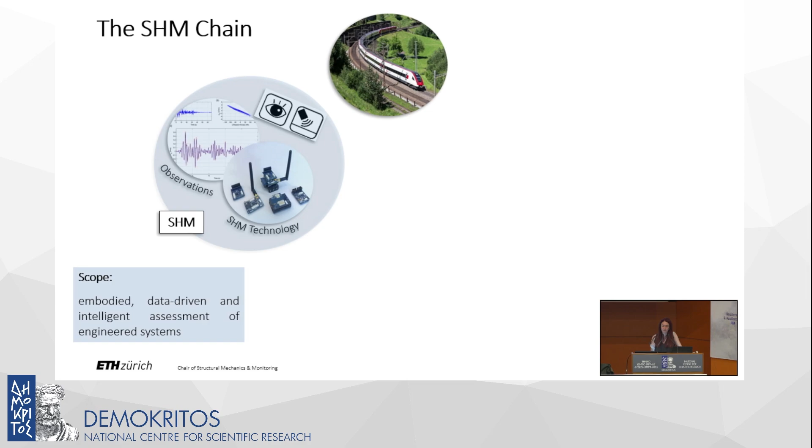So I would like to first introduce the problem of structural health monitoring, which essentially relies on the perspective of viewing physical assets as cyber-physical systems, in the sense that you initiate from a physical asset on which we can extract information by means of sensing, which nowadays we can actually extract through various types of sensors serving different types of properties, and which come at different precisions and costs that are even deployable on large-scale civil engineering structures, which is a lot of the domain of the activities that I will be overviewing,

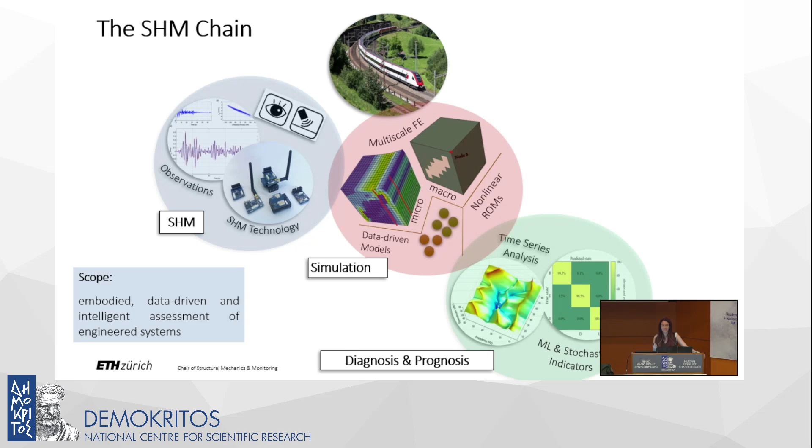and which can be used to understand and produce indicators on the condition of a system as is, meaning as it is currently operating, which is more of the task of diagnosis, as well as predicting the behavior and performance of the system in the future, which is the prognostic task. Now, the key to deriving these indicators in a way that is meaningful, we at least advocate in the group, is to use models that are rooted on principles of engineering, on principles of mechanics and dynamics, or first principles in general for understanding the translation of the raw data into meaningful information about system condition and performance.

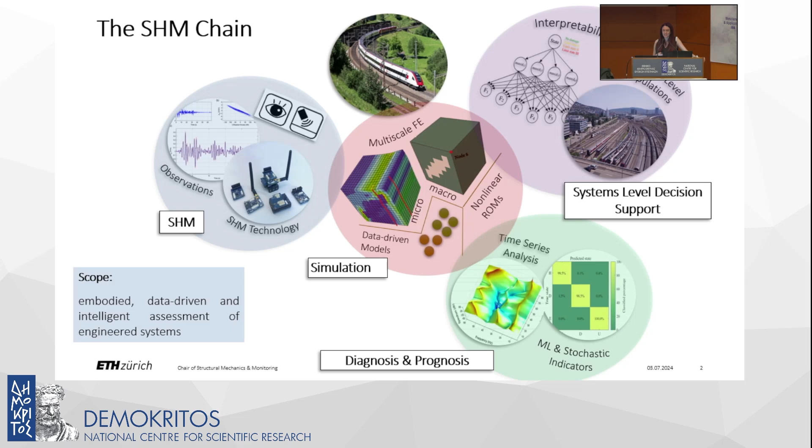And as a last layer of this, let's call it SHM chain, what we would like to do is to extend this kind of performance from the individual system to the level of a fleet or a population of assets. As you can imagine, this could be the roadway network comprising different types of engineered systems, such as tunnels, bridges, or even the road pavements themselves, or a wind farm, which is a population of individual turbines, or even different types of industrial components that are actually comprised of individual elements that are operating and whose performance is critical to assess.

So this talk is going to build on the aspect of modeling, and in order to do this, I would like to actually start from how you can develop models purely on the basis of utilizing data. And again, to place some context in what I will be explaining, I will first overview a few types of data sources that we are dealing with as part of our group at ETH Zurich. So these kinds of data can come from diverse types of systems.

A first option for us is to use what is called the mobile sensing approach, which is the deployment of sensors on vehicles, either train or regular vehicles that are traversing different types of infrastructure, and where you're able to derive information on the condition not only of the vehicle itself, but also of the system that it is actually traversing.

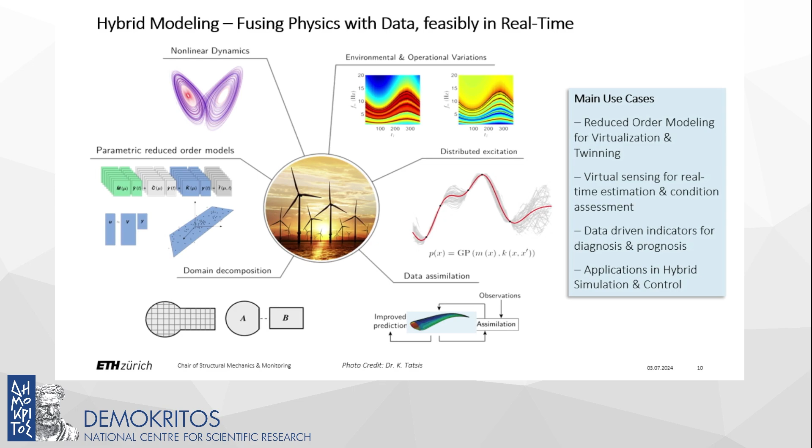So if you would like to describe the task, in a sense, we're trying to achieve everything everywhere all at once. And this is how it would work. If you have a structural system for which you have sensors in some limited positions of the system, and the system operates typically under unknown input loads, we have, as engineers, an a priori model of the system that can give you an idea of how this can behave, but usually, especially for existing structures such as bridges, this kind of model is not well defined, so it has unknown or uncertain parameters.

And what we would like to do is to predict the behavior of the system in its full field, so visibly in every location of this system, even in locations that are not measured, which is why you cannot really escape with black box models, because you need to predict physical quantities that are not actually directly being observed.

So we would like to have a specification of everything in the system, which is also known as the task of virtual sensing. And we would like to achieve this everywhere, so very densely in our system, under the premises of uncertainty, nonlinear or non-stationary behavior for dynamical systems, observations that are limited and are suffering from noise corruption due to the limitations of our sensors, but also large dimensionality of the actual large-scale systems that we're observing, and we would like to possibly do this in real time, so all at once.

And I'm going to show you our approach to achieving something like this. And I would start from where we typically start from as engineers, either civil or mechanical engineers, which is models of computational mechanics. Now, out of curiosity, I know this is a slightly different thing, but I want to check how many of you have studied a course on mechanics. Great, so many of you have, which means that I can at least exploit this as the basis.

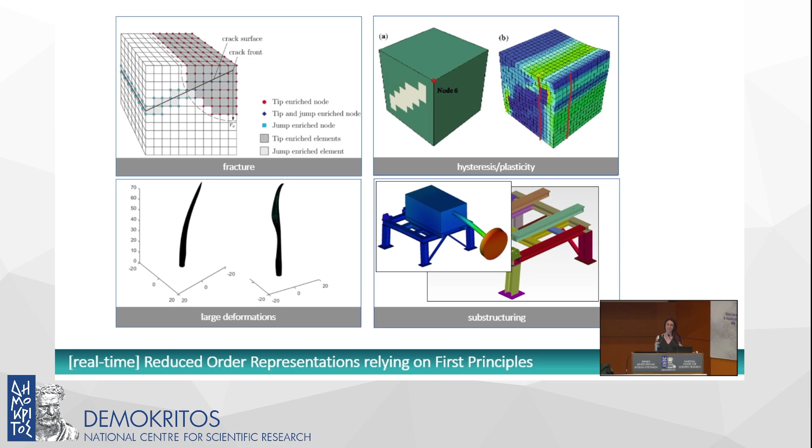So the very first thing we have to do is to actually reduce these types of models to the point where the computation makes sense and even is achieved in fractions of a second, which is really what we would need for our compute. One way to do this is to start by actually using the original, what we would call full-order structural mechanics or mechanics models, and to produce several realizations, computations of these models.

What you can do next is to take the time history data from such models and pass them through a feature extractor, such as an autoencoder, for example, but additionally, an integrator that is able to follow the dynamics, which for us would be a type of recurrent neural network or an LSTM.

The benefit in this being that you can actually solve your dynamics equations in the lower dimensional space, which is the feature space of the autoencoder, but at any point in time, you can actually return back through the decoding step into your original physical system, which is the full-order finite element model in our case, for example, where the physical properties actually lie and where the monitored properties also exist. So quantities such as accelerations or strains will be linked to this full-order space.

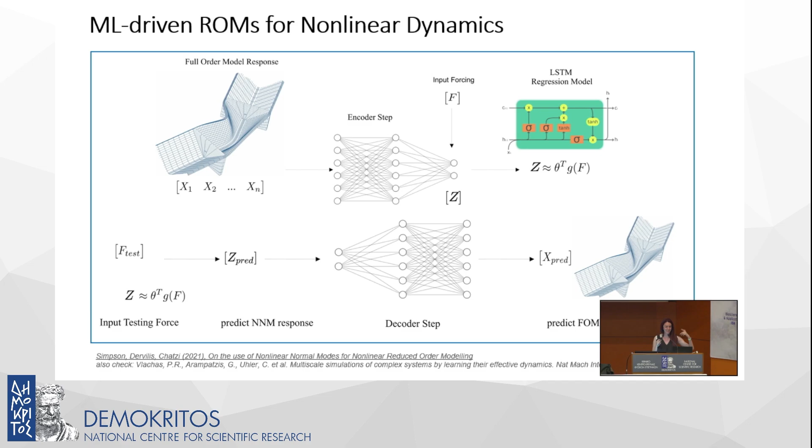Now, in our case, we use this to make the analogy of reduction to what we call the nonlinear normal modes of dynamics in the work of Petros, which is also very closely related for uncovering LED, learning effective dynamics. You can see something similar for more generalized systems.

But just to show you the use case for us, you see that what we tried to do experimentally was to show that indeed we derive these independent representations by using specific versions of the autoencoder. So for example, by using a variational autoencoder, you're encouraging a spherical Gaussian latent space, which means that the components are independent and are easy to separate in the spectral domain, which is of particular interest for us for manufacturing a model that is efficient.

And then we use this kind of logic for an actual problem, which is to approximate the response of wind turbine monopile structures. This was a problem that was given to us by our collaborators in Siemens Gamesa. And the problem here is actually a nonlinear problem, which is induced due to the soil structure interaction. We're trying to capture the nonlinear dynamics that is generated from these actual systems by fitting a model that computes only in fractions of seconds instead of the several hours that this compute would require for the actual engineering task.

Now, in what I described so far, we have a construct that produces a model that can compute fast. You need to devote some time in training, but for us, it's more the actual time during testing that would matter in this kind of application.

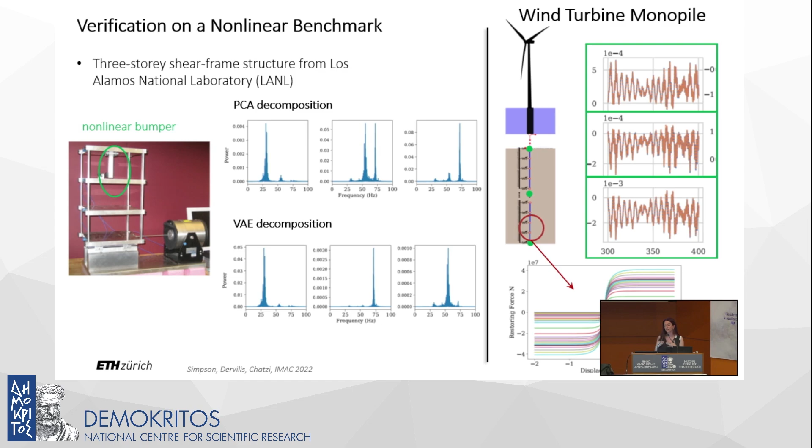The drawback is that I have not yet shown how to condition this kind of model for different parameters so that it is really a generalizable kind of approach.

So next, I would like to show you an approach that we typically adopt for producing reduced order models of dynamical systems that are fast to compute but also conditioned on different types of parameters that are underlying our problem. And to do this, we have constructed, again, more from a structural engineering perspective, a benchmark structure of several degrees of freedom. It's a dynamical system that exhibits nonlinear hysteretic response.

It is described by a set of multiple parameters, including the configuration of this structural system itself, which are basically the stiffness properties of this shear frame, but also the properties of the input to the frame, the loading of the frame, which for us is an earthquake type of load that is characterized by its spectral and temporal properties over time. So we can even break down an earthquake into a set of parameters, and we would like to be able to feed these parameters into our configuration, and we would like our reduced order model to spit out very fast the entire time history simulation of this nonlinear system for different types of these parameters.

So to do this, we're capitalizing on the physics of the problem, and for us, in these kinds of problems, the physics is usually a differential equation of second order, which is nonlinear, and which is conditioned on the parameters that I explained before are governing the problem. And what we can do is to initiate from this original simulator, which usually could be a finite element model of a large number of degrees of freedom.

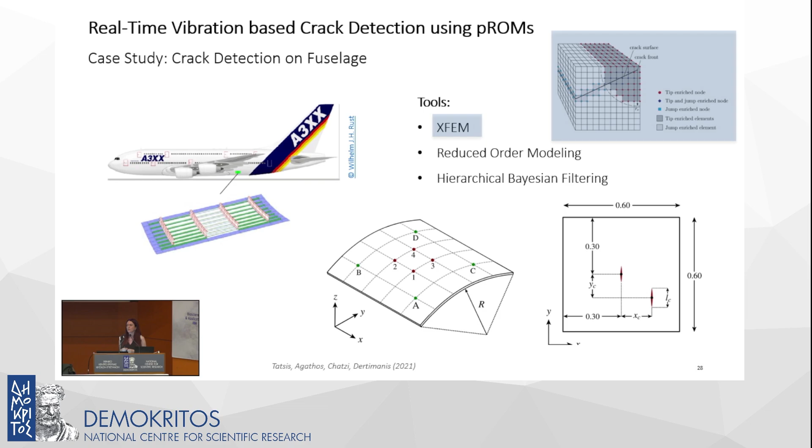Now, the reduction method is similar to what I explained before. There are a few intricacies that I think are beyond the scope of this talk, so I will not very deeply explain. But the fact that here the parameters, which are basically the position and orientation of the crack, induce a non-smooth problem, makes the solution of the problem also non-trivial. It means that we have to figure out a way to extract these bases in a way that is efficient.

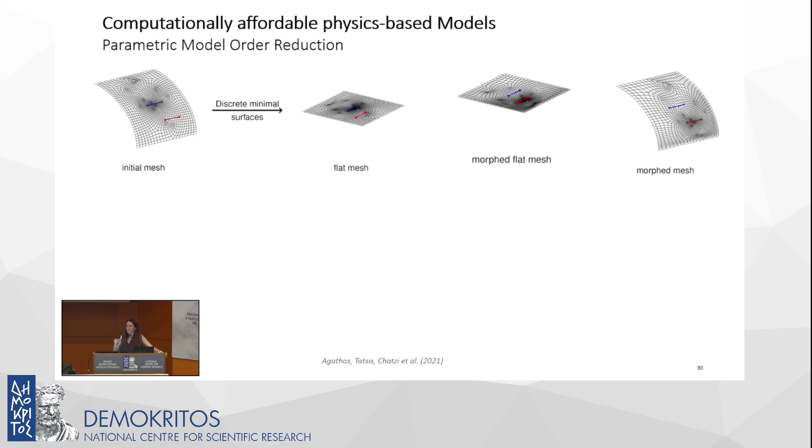Typically, if you have ever solved a fracture mechanics problem, you would know that the tendency is to remesh and define new nodes when you have a cracked surface. Here, for us, this would not work because it means we would have a new number of nodes and we cannot actually reduce our model. So we use mesh morphing, which is essentially a trick so that we have a fixed amount of nodes, but we're able to represent different positionings and configurations of the crack in our geometry, even if it is actually a curved structure. And then, using the projection-based approach, we can build this parameterized reduced order model that computes the vibration of this kind of surface when it is cracked in real time, so actually faster than this video is rendered in this case.

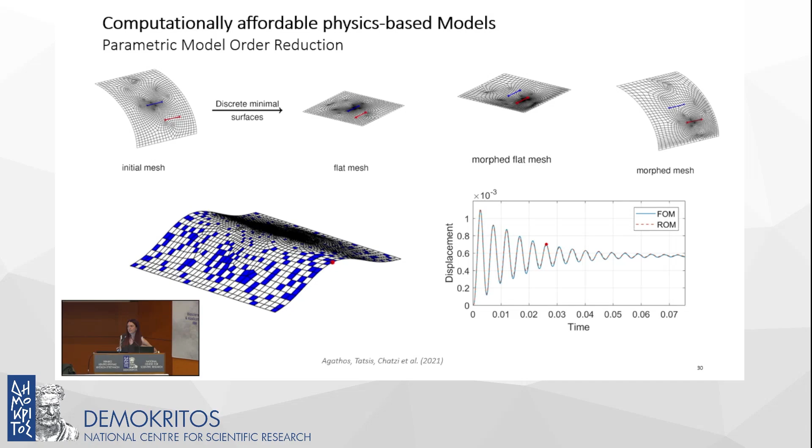If we have this reduced order model, we can then place it as the main computational or physics engine inside the Bayesian filtering approach that I explained before. This is actually a problem that's very close to our daily business in the sense that also here we do not know the input load to this system. We cannot really claim that we have an accurate measurement of the pressure or a full measurement of the input field to this aircraft, so we assume that the load is unknown. We have different ways of tackling the evolution of that unknown parameter, but we can basically place it in a type of filter such as the one I explained before.

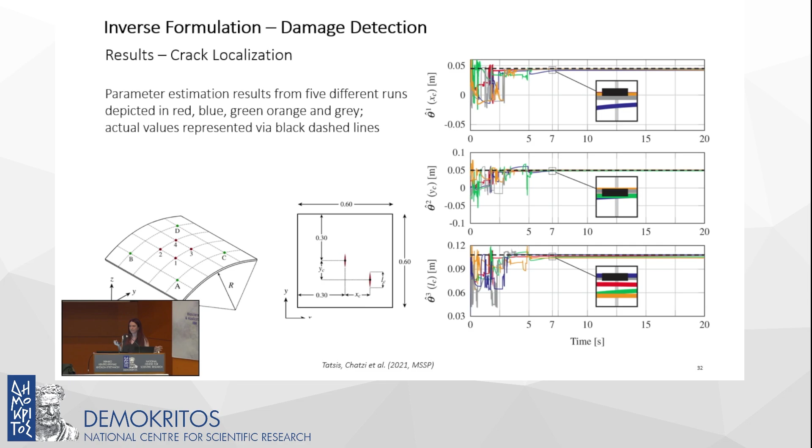And here we can achieve this kind of joint state, parameter and input estimation task, which means that by using this reduced order model and placing it inside of the filter and using the four sensor information that we had before, we can first of all achieve the damage inference task, meaning that we can understand the location and characteristics of the cracks, if any are actually present, on the surface that we're exploring. And quite importantly for us, we can also predict the response of the system in these unmeasured locations, essentially in the full field, since you have an engineering model. And we can do this in real time for facilitating other types of tasks, possibly tasks of control, for instance, that could be of relevance.

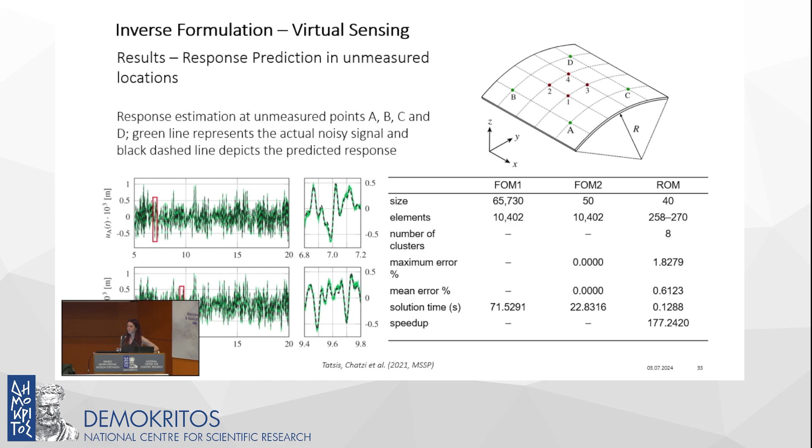The reason why this is possible is because we now have a reduced order model that computes at fractions of a second, as opposed to the original computation, which would be much lengthier, even if we were to use an accelerated and improved model. Now, of course, this was just simulation, and it is more convincing to show you an application where this has been applied. So here I'm showing you an application of this kind of logic in collaboration with Siemens Industry Software, who are our partners.

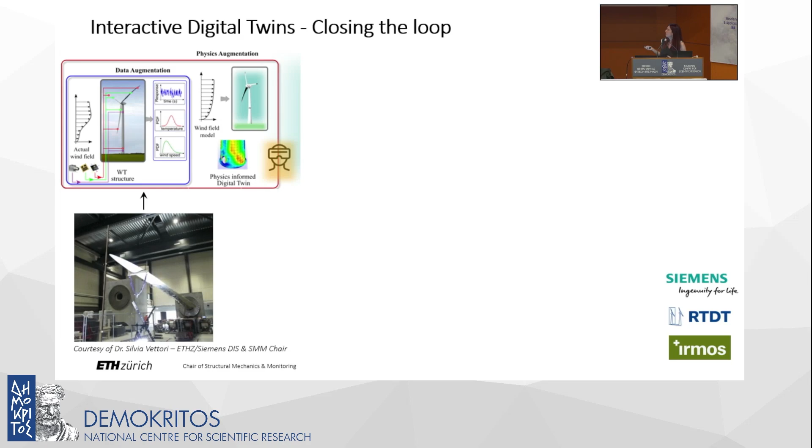And then, through her computation, she's able to deliver a predictive tool that can give us actually the stress distribution all through this blade in real time, transferred to the tablet here of engineers that can then use it for all sorts of downstream tasks that have to do with condition assessment, either through derivation of indicators of the performance of the system by using the estimated stresses, or even for forecasting further aspects that have to do with the resilience of the system, such as what is the remaining useful life, or what would be the robustness of the system under increased loads.

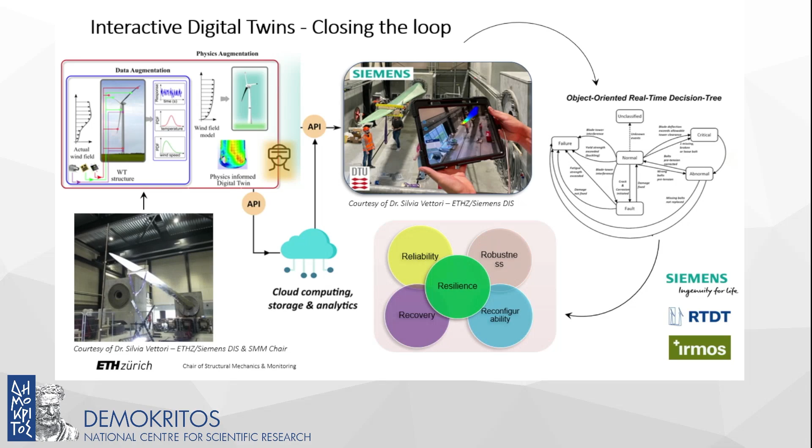As part of the group, we now have two spin-offs that are taking these ideas and are implementing them into practice. So RTDT is using these ideas for wind turbine systems, and IRMOS Technologies are implementing these ideas for the monitoring of civil infrastructural assets at the moment, always capitalizing on the fusion of data with these physics-based models.

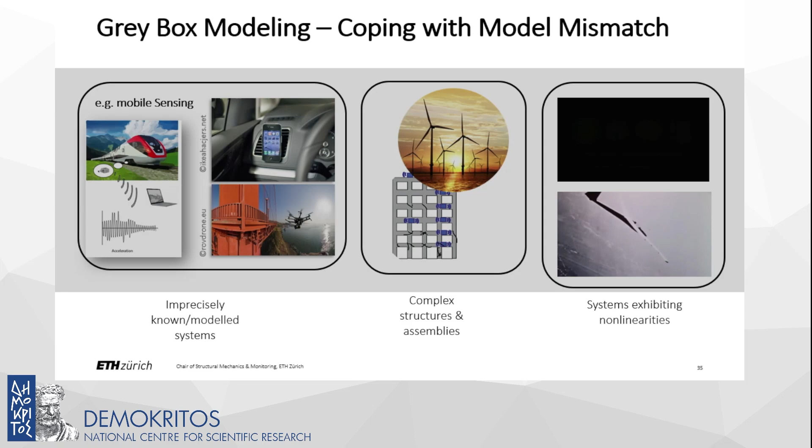But in many situations, this is not the case, especially for systems that are more complex in nature. In this case, we cannot claim that we know all of the physics that can adequately describe the problem, and oftentimes this is the case for nonlinearities, but also for phenomena that have to do with damping and dissipation of energy that are not very well described or understood. So in that case, we have what we would call a model form uncertainty. And in that case, you have to start moving lower down the spectrum towards, let's say, a heavier exploitation of data.

Before I start explaining that, let me explain what would be the absolute black box version, where you try to model a dynamical system with this Bayesian logic, so at every point in time, but without claiming that you know anything about the dynamics. So what you could use in this case for achieving such a task is a temporal variational autoencoder, which is also known as a deep Markov model. In this case, you can actually derive the dynamics of the system, which is the transition function, and the reliance of the observations that you have on that latent dynamics, which is no longer a physical variable, by deriving an appropriate emission function and an appropriate inference model.

All of these can be, in this case, not preset, as I showed before for the Bayesian filtering, but they're inferable. So you can figure out what this F and what this G is, what is the model of the dynamics, and what is the model for our observations, just by using data. The drawback is that this Z, the latent variable, does no longer live in the physical space of your system. It's a latent variable that does not have physical connotation and is not necessarily explainable. So also your predictions are only limited to what you can explain, which is really the locations that you observe. So this kind of model is not so helpful, but of course it's very good when you don't have any idea about how the system operates.

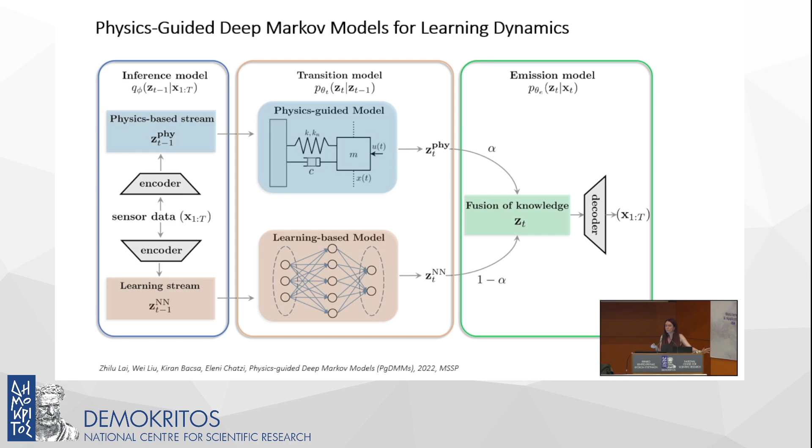This is what we will do here. We take the DMM architecture and we fuse this kind of known transition, but we admit that it is not perfect, and therefore we also have in parallel a term that is there to take on the model discrepancy, a term that is to be learned from data. So if you look at the deep Markov model architecture that I showed before that was a black box, what we change here is that in the transition function, we no longer have one, but two tracks, the first of which is fully defined by the physics model, the part of the physics that you claim that you know.

We accordingly then modify the definition of the ELBO, and then we're able to discover not only the parameters of these black box or learnable models, but also the parameters of the model that defines the physics. I'm going to show you a very simple example just to make the point clear. So this is the example of a pendulum, which is a nonlinear oscillator. The full equations for such a simple problem are of nonlinear nature. This is, again, a simple problem that just tries to make a point.

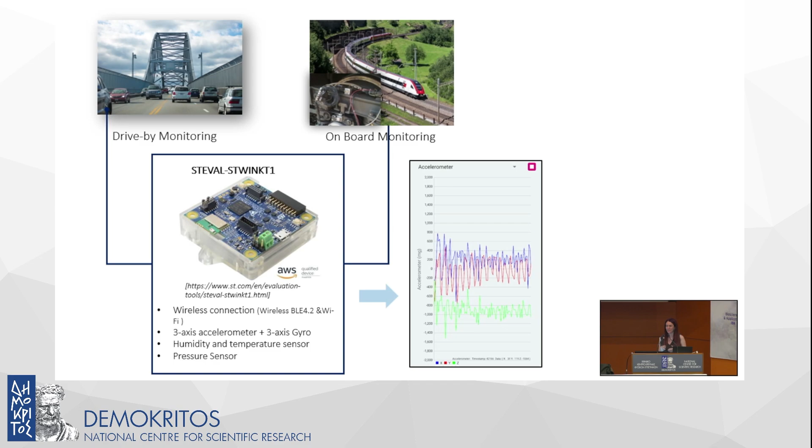Now, this was a simple problem, but we actually use this kind of a principle for practical settings. And one of these settings I explained in the beginning for us is drive-by monitoring or onboard monitoring, where we use sensors on vehicles, either on train systems or actual road vehicles, to understand the condition of the substructure. Here we're using sensors that are relatively low cost, such as MEMS technologies. We're extracting indirect indicators of the condition of the substrate, the roads or the bridges that are being traversed, which are collected via use of vibrational data, typically accelerometers that are mounted on these vehicles, and we're trying to achieve infrastructure assessment.

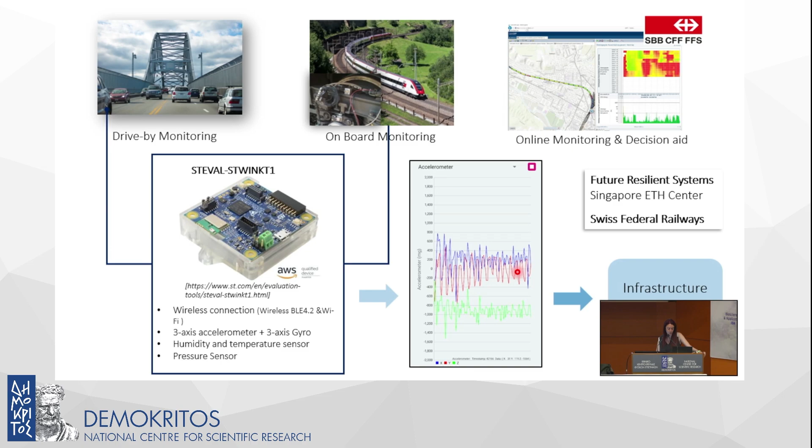This is a task that we're pursuing both in Switzerland with the Swiss Federal Railways, as well as in Singapore with different partners. And here we're also bringing this kind of a concept. So here we have vehicles of general nature that are instrumented. We cannot claim to know precisely the model of these vehicles, but we know more or less that we can approximate them with some sort of engineering model, and we're using this kind of information as the part of the physics that we adopt for the system, whereas we try to learn the rest of the dynamics of these systems by using sufficient data. And we do that with the purpose of understanding properties of the substrate, for example, the roughness of the traversed infrastructure.

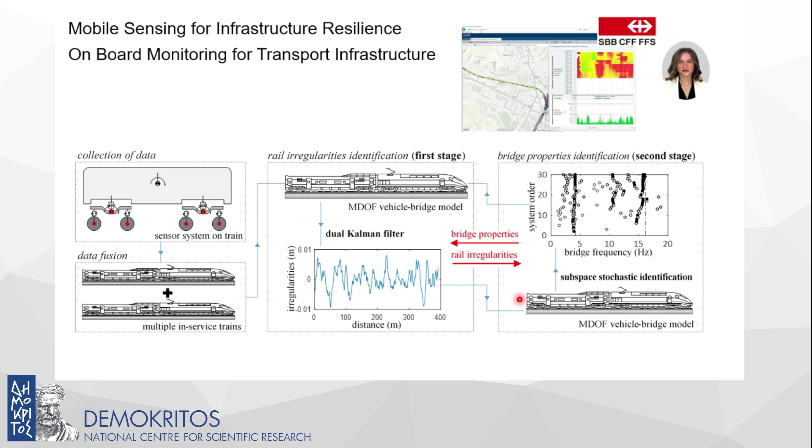We're now going to be corroborating this kind of approach on a project we have with India, with the Indian government and the Roads Office, where we will be instrumenting a vehicle for understanding the condition of new highways. This is a collaboration with Kistler, a sensing company based in Switzerland, and our spin-off RTDT. But we're also doing something similar using trains for the Swiss Federal Railways. In this case, using trains to understand the condition of bridge infrastructure systems, which is a more complex task, because also there are interaction aspects between the bridge, so the structure, and the vehicle that are not very easy to model. So again, we have to rely partially on what we claim to know from the physics and what can be learned from these kinds of learnable models.

Now, this principle of using biases that are, let's say, positive for the behavior of the system does not have to strictly rely on physics. You can also impose aspects such as structure and dynamics that can also be beneficial. And this is what we did here in the neural extended Kalman filter. Again, we took the black box deep Markov model architecture, and we tried to impose actually the evolution or inference equations that we know apply from nonlinear Bayesian filtering, which was the first case that I showed. There, we have very well formulated frameworks on what should be the update equations on the basis of our nonlinear functions. And so it turns out that if you impose them on the formulation of the inference problem, although it's not straightforward physics, it is structure that is actually beneficial for learning the structural dynamics representations.

Again, you would find this kind of a model together with code, completely open, where we show how you can use it as something that is actually a gray box, something between the black box temporal variational autoencoder and the white box extended Kalman filter that uses prescribed physics of the problem. There are several benefits to this. I won't stay too long here. I will just show you how this works on actual applications, which is really the motivation for us. For example, the prediction of the time history response of a building structure under real earthquakes. This comes from real buildings and real records that we have access to, or are open access for researchers to attempt these kinds of simulations.

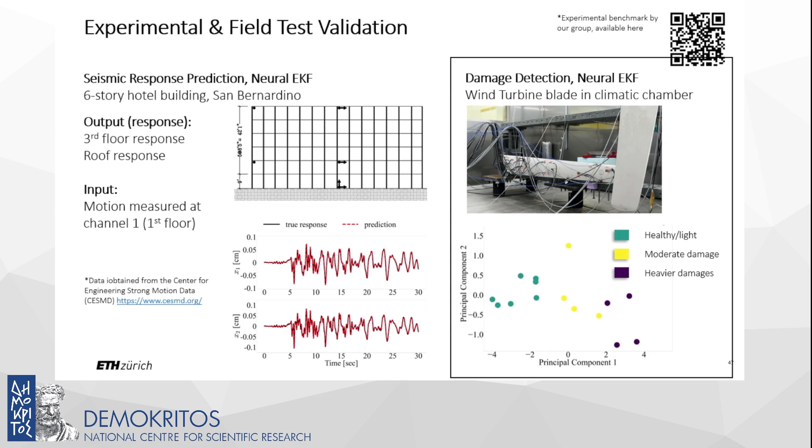Here as well, it's not very easy to define a very successful model of the system, so we benefit from using these learnable representations. Here in this experiment, we also do this for experimental prediction of blade structures and understanding where damage could occur. Or for the purposes of control, we can do something similar.

So we achieve this, but what is also quite interesting for us, and probably also for other applications, is that the learned part does not really have to stay as a black box either, because you're fitting a function, even if it is a neural network function, and as a next step, it would be possible to apply dictionary methods if you suspect what would be the terms that regulate these dynamics, and fit these kinds of known functions into the black box term.

In this way, actually inferring in some form even the physics that is unknown. So we could discover the physics that we're missing by using this kind of an approach, in this case, using sparse regression for understanding what was the recovered term.

And then, as we're nearing completion, I would like to show you what is next for us and why we resorted to the development of these kinds of methods. As I mentioned earlier, one idea is to try and extend these kinds of predictions to the level of a system. So for example, for these onboard monitoring systems that we develop, we're now trying to see with actual platforms how the extraction of data with low-cost sensors from extended infrastructural systems can translate into the assessment or condition indicators for these kinds of systems at large.

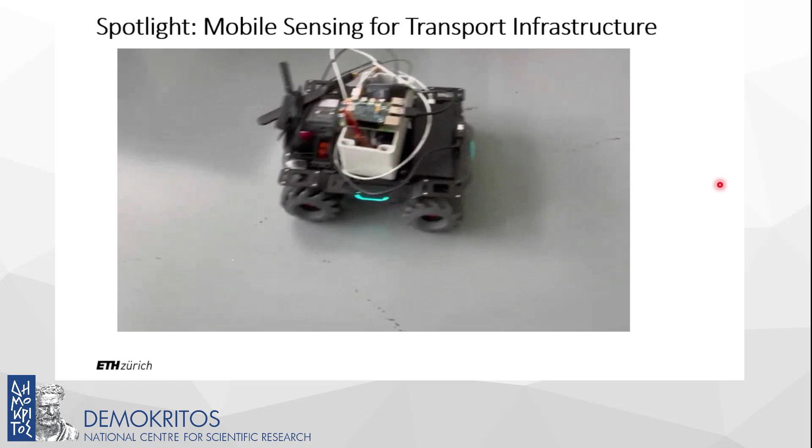To begin with, for our project in Singapore, we have actually used this kind of low-cost mix of sensors that are deployed onto a robotic platform, which is this kind of toy robot that you see here. We deployed these sensing solutions, and now we have this robot traversing the shoulders of bridges, collecting information about the dynamics of bridge structures through Singapore, through a pilot collaboration with the Land Transport Authority there.

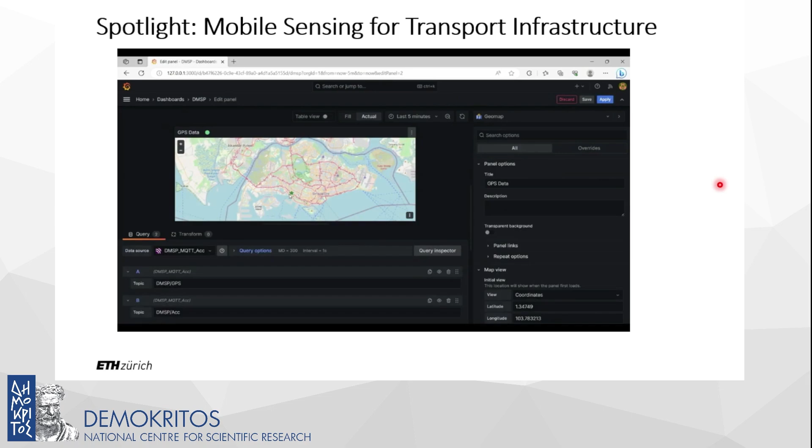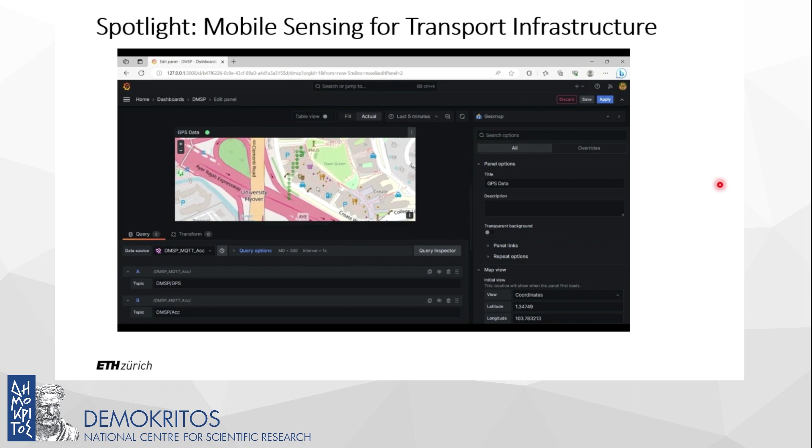And we do the same with bicycles, where we mount this kind of sensing box, and we use these bicycles to traverse the bicycle network and then derive indicators of the condition of that network, meaning the condition of the pavements, what is the comfort of the user, and then plot it in real time on our platform tool. So we are able, if we have such computing models, to then also deploy them at scale, but the idea is to also use them for supporting decisions.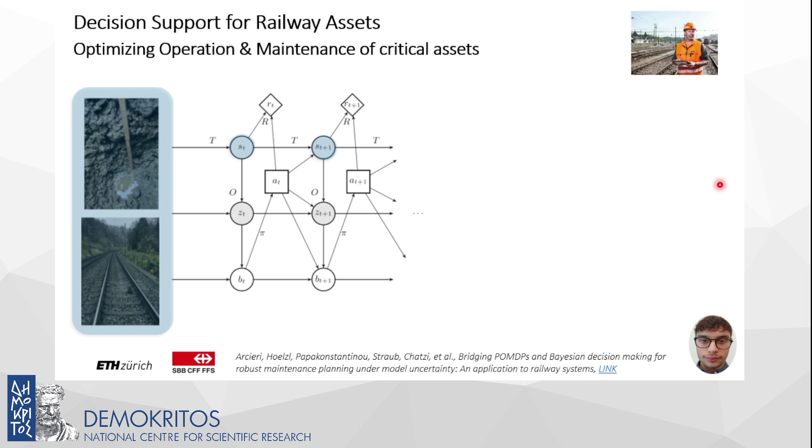And a way in which you can do that is, again, through a stochastic type of framework that derives these indicators of performance for our subsystem. In this case, I'm showing you an application with the Swiss Federal Railways again. Here we're interested in understanding the condition of the ballast, the substructure, what is essentially under the rails. Usually we're looking into moisture problems, problems that have to do with the irregularity of the rails that can actually result in accidents.

And in order to derive this information, we use the principle that I showed before. We extract indicators that rely on cheap to collect information. In this case, we're using a fractal value indicator that comes from acceleration recordings of a diagnostic vehicle. We collect these over time, and then we try to build a model that exploits this historical data. In our case, it's a partially observable Markov decision process that tries to advise, on the basis of these observations and their effects on the system, what is the optimal action to take so that the operation and maintenance of these systems is optimized within a planning horizon, typically of several years for these kinds of applications.

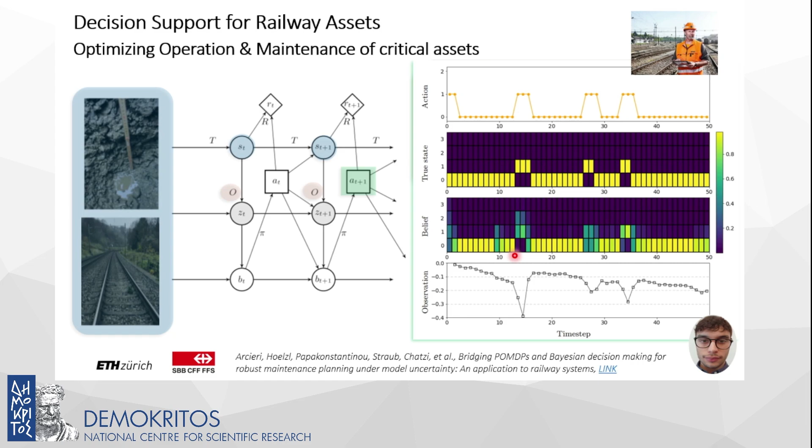Now, to solve this problem, there are different ways to formalize it. We have used the POMDP approach, which I show here, but it's also very interesting to formulate it as a reinforcement learning problem where you discover even the environment, again relying on the principles that I showed before, and we're actually using the deep Markov model to discover this environment while placing it in a reinforcement learning setting.

The further aspect that we're interested in is learning at, again, the ecosystem level. And here, some of the additional biases that can be exploited are actually also the interconnectivities of the components of the network.

And you can very conveniently fuse such information by using graph-based representations. So we're also using graph neural networks, which could contain within them biases of the physics for understanding performance of systems such as wind farms, where the interactions are paramount, and where we would like to generalize, understand the performance of new systems, meaning new farms that are about to be deployed for specific site conditions, by learning on previously monitored populations. These graph-based neural network models allow us to have such predictive potential that can also guide the design and optimization of deployment of these systems.

So with this, I would like to actually come slowly to my conclusion, which tried to offer you this overview of building digital twin representations that are what we call augmented, in the sense that they comprise various layers, starting from the data itself, which contains a lot of information, but which needs translation and interpretation, which is where the models come in play. But of course, these models have to be efficient, have to be performant, have to be compliant with the requirements of your downstream task.

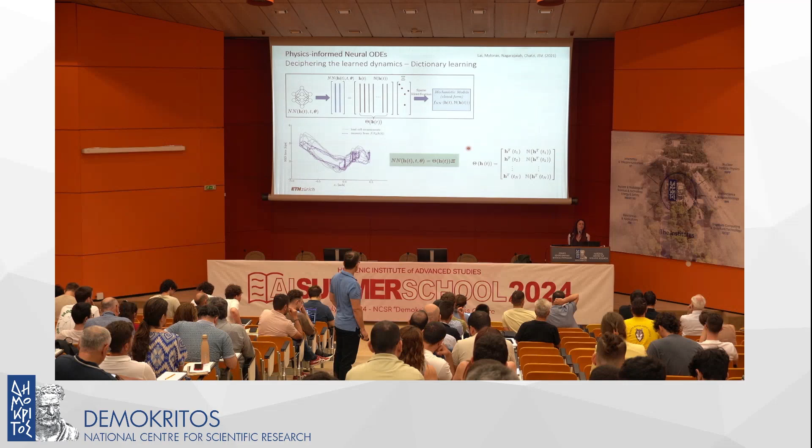And of course, as you realize, when you start corrupting it with something that is higher than perhaps realistic, the model may break down. And that's what it should do, in fact. But again, because we're driven by real applications, we can show that this would work for the actual expected levels of noise that we know, at least for sensors, they are very, very well described by specifications. The other aspect of noise is what comes from the insufficiency of the model, so this is something we also toy with. And then we try to always match with the actual observed behavior. There's no value to these models unless there's validation, which is why you saw me insisting on showing experimental and full-field validation cases.

Other questions? Yes, over here. Thank you both. Yeah, sorry.

First of all, I would like to thank you for your presentation, and I would like to ask: in the beginning of your presentation, in the slides, you show that you are collaborating with wind parks and railways. Does this collaboration have to do only with collecting data and studying in physical terms, or also with solving problems these sectors have?

No, it's primarily motivated by solving the problems they have. The primary problem being the one of condition assessment, both in terms of what is the condition right now and is there damage right now, which is the most common request, but also predictive tasks. How high loads can I anticipate in the future, and will my system perform for the next some years? What is the remaining useful life? And this is why we try to deliver these twin representations.

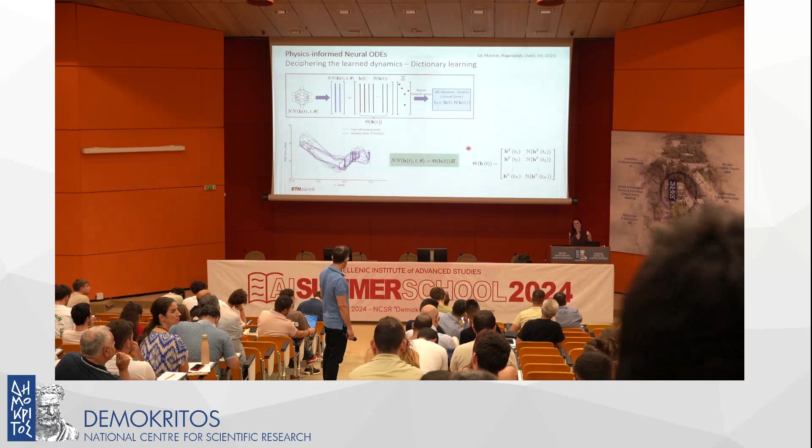So yeah. These kinds of reductions have also been shown on multi-physics types of problems, and there are substructuring methods as well that try to take this on. They solve the dynamics that is finer in one scale, and then they try to integrate this with a surrounding medium that is of a coarser scale. So things like this are possible. But what I would say is that the benefit of such architectures is that this probably can be taken into account by attributing different features, that maybe you devote different effort to compute at the scale of time that is appropriate for each one, and then you bring them together into something that still describes in a cumulative fashion the problem.

For us, graphs are very important for this kind of justification, because there with the flow in wind farms, we have such issues. And there you would see, for example, that we do computation of nodal and edge features at higher sampling rates, whereas global features usually evolve at a different time scale. So we do a conditioning at these, let's say, slower evolving features, but all of them can align in the same construct.

And my second question, sorry, let other people ask questions as well. So one final question. Thank you very much for a very interesting presentation. My question is also on this slide. First of all, something potentially stupid, and I apologize if I'm not understanding.

Is in this case the dynamics ruled by the physics and the neural network additive? So it is additive. In this case, we assume a simple superposition. It's not necessary. In this specific model, it's a superposition. Okay. So in this case, you're trying to figure out a closed form approximation to the neural network. To the learned term, yeah.